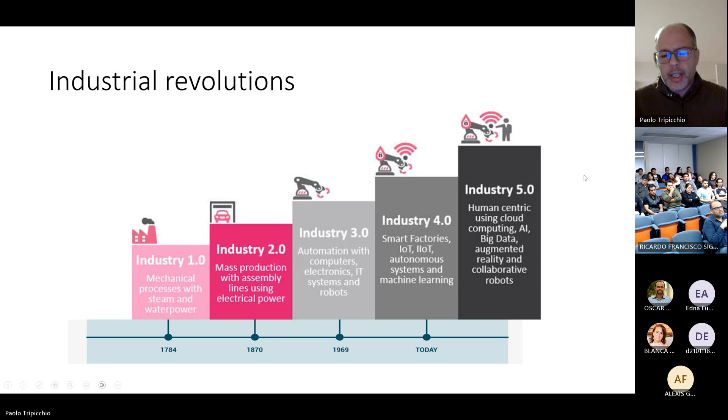And today we are in what we know as Industry 4.0 or 5.0. Basically there are a lot of techniques or disciplines that are fused together, and we are trying to focus on the human, so on human-centric industry. In particular, Industry 4.0 has been funded worldwide in European, US, or even Italian programs, focusing on many pillar technologies, like the ones shown here.

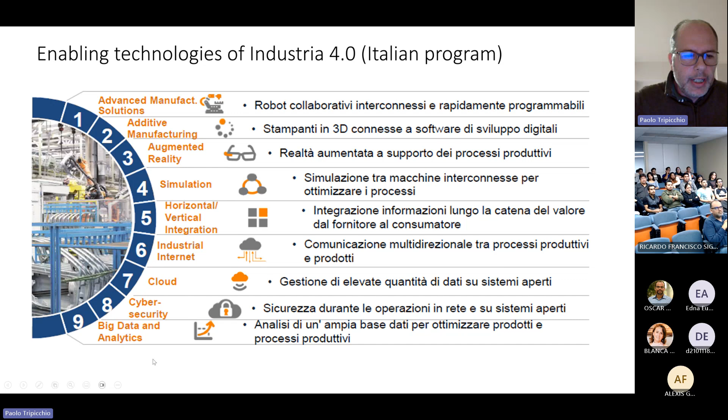So, for instance, additive manufacturing for 3D printing of parts, or augmented reality, or Internet of Things, industrial internet, and introducing also artificial intelligence through big data analytics and applications.

So what I want to discuss today is what we have to expect from the industrial point of view, where we are moving, and how to try to solve the demands, the difficulties that could arise in the next industrial scenarios. We have to ask ourselves what are the demands that the market and these scenarios search for.

So the first consideration is that for sure we are moving from environments that are completely structured, so we know every phase, every single line, what should be done, and instead we are moving to unstructured ones. So we don't know a priori the sequence of actions that we have to perform to accomplish a given task.

The second aspect is that many processes in industry today require the flexibility of humans. The flexibility from a point of view of cognition and perception, so to understand what has to be done and to perceive the environment and the aspects, the complications that could be in the environment, and of course also adapt, if we look at manipulation capability, so adapt the way we interact with objects and tools within the industry.

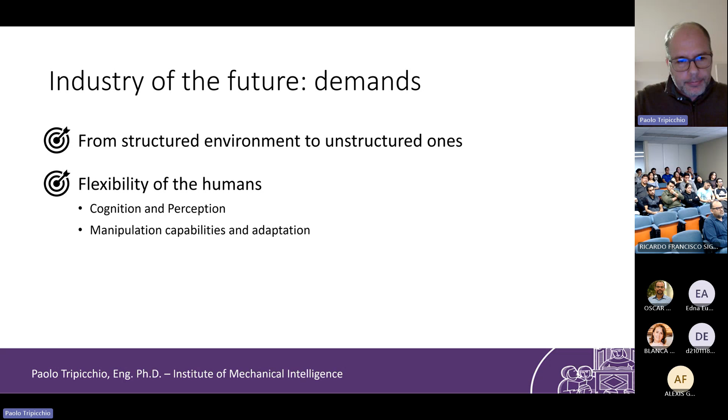A third aspect is that we are moving back from what was mass production to instead realizing customized products. So for each client could go on the internet and order a specific product, but customized for his needs. So we need to be able to reconfigure the cell to adjust the process to create specific products.

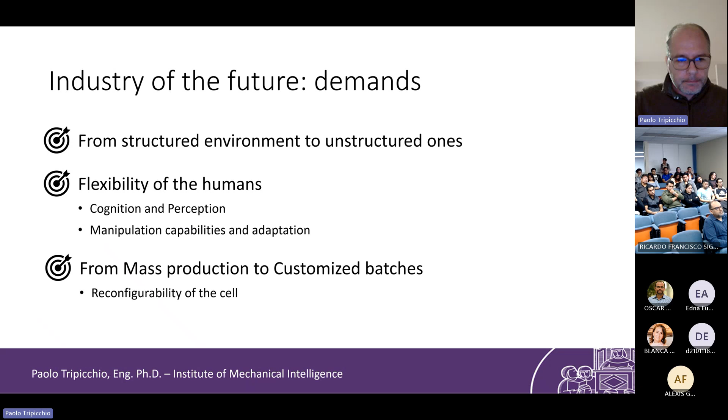So the paradigm is shifting from the simple-by-design paradigm, or with the Latin motto divide et impera: I decompose a complex problem into several small parts so that I can manage easily to solve these parts. Instead, we are going back and we have to face the uncertainty. This is something that in field robotics is done every day. Basically, we have to construct a model that represents the world, that takes into account uncertainty—the fact that I cannot easily model everything, so there is some sort of noise in the process, and I have to deal with that.

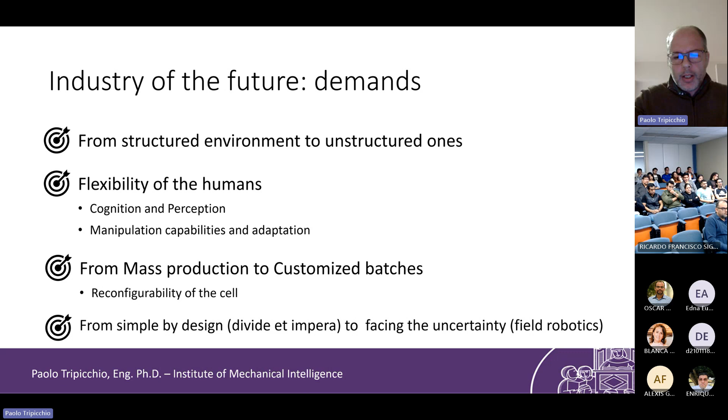So how can we do this? Basically, we have three elements that are common elements for every control engineer. The first element is the sensing. The idea is that I can create or put new sensors into the process.

So sensors that allow me to measure something that I couldn't measure before. For instance, an application that I've done a few years ago, where we 3D printed robotic fingers, with the aim of creating conduits to place fiber optics in. This fiber optic is used to sense the stress and strain of interaction with objects. In this case, the principle is really simple.

We use the Bragg effect. Basically this is the fiber core, and we write on the core these gratings. We make these parts of the core opaque, and when light is injected into the fiber, part of the light is reflected back on the reader, depending on certain wavelengths that depend on how I wrote the grating on the core.

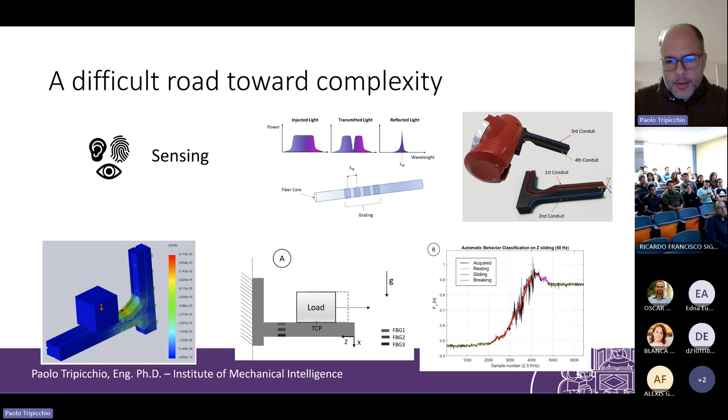But when we are talking about sensing, we don't refer only to the use of new sensors or integration of sensors, but also how we process the information. In this case, there is the field of artificial intelligence. We know that we can build particular architectures that allow us to be more robust, to improve our measurements.

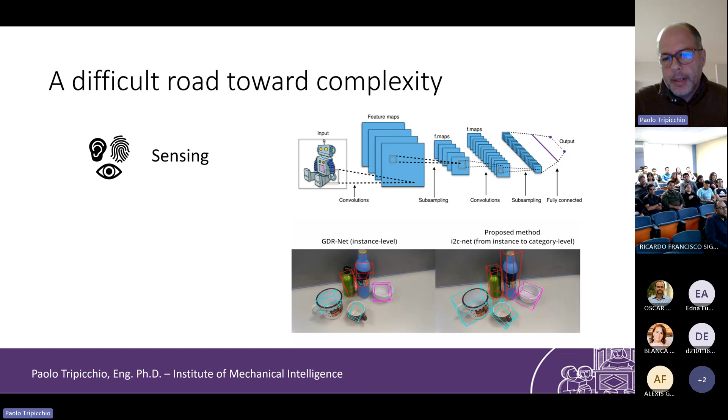So the second element is the actuation. Again, here we can integrate new concepts, new materials, new ways to actuate, for instance again in the grippers, and perform actions into the world.

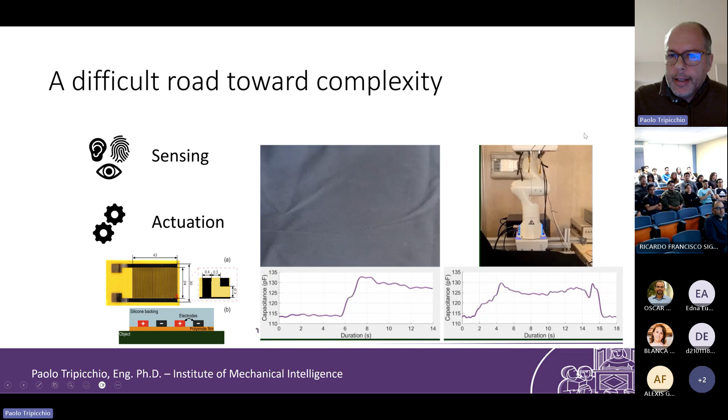Here is an example of an electroadhesive gripper that we developed. Basically, we replaced the fingers of the robot with this electroadhesive pad, and as you see, we are able both to grasp objects and also to sense, by looking at the capacitance of the circuit, if the object has fallen from the grasp. So in this case, we have integrated both actuation and sensing together.

The third element is the control. In this case, again, we can insert intelligent controllers, so we can build artificial intelligence algorithms directly inside the controller.

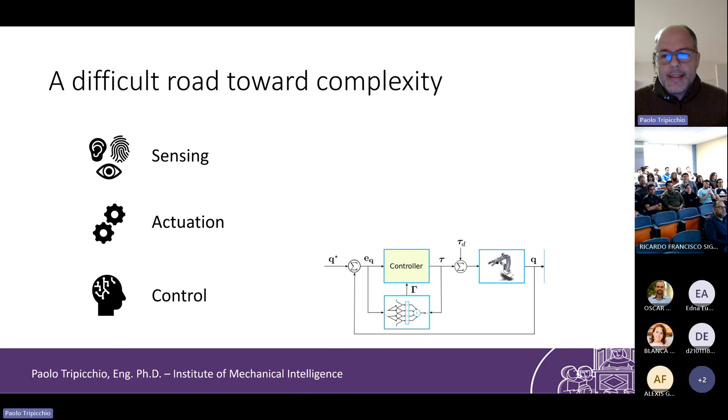For instance, here we have an application of imitation learning. We can train our control strategies directly in simulation, in this case using a couple of graph neural networks in cascade. The system is able to understand the sequence of motion and task it has to accomplish, starting from one single image—in this case, one single image of the goal configuration that I want to achieve.

And then I can train on simulation and transfer this directly to the real world to verify if our approach, our algorithm, is robust enough to work on real scenarios.

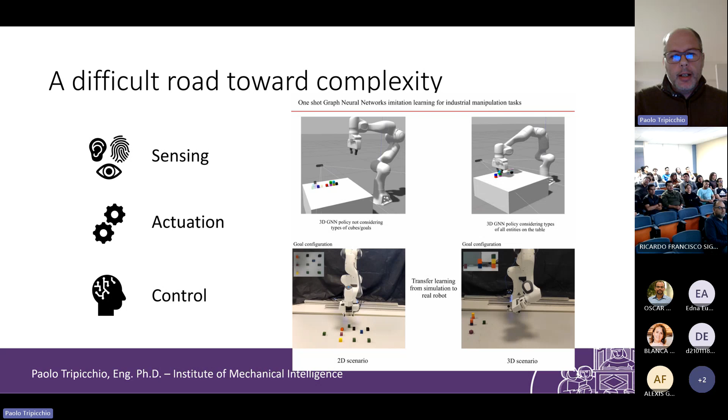So I will start now to show you some applications specific to the field of robotic manipulation. That is one of the biggest application areas in industry.

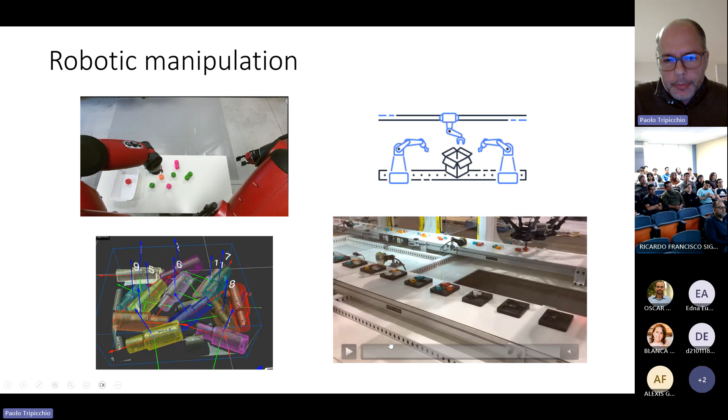When we talk about robotic manipulation, the main problem is picking and placing objects in an environment. So we have three elements in this problem: one is our robot, another is the vision system, the sensing system we discussed before, and then we have the object to be picked or placed.

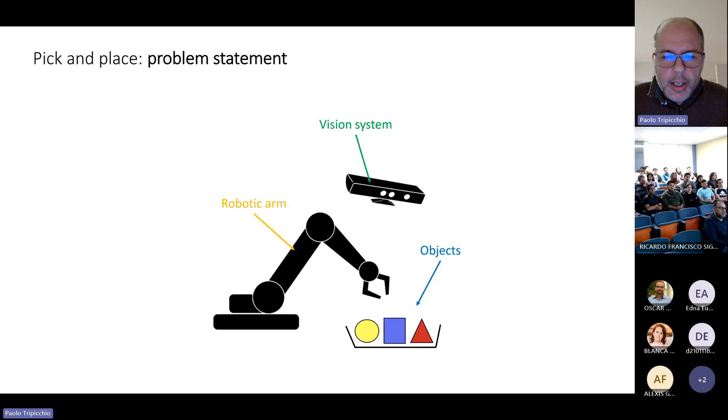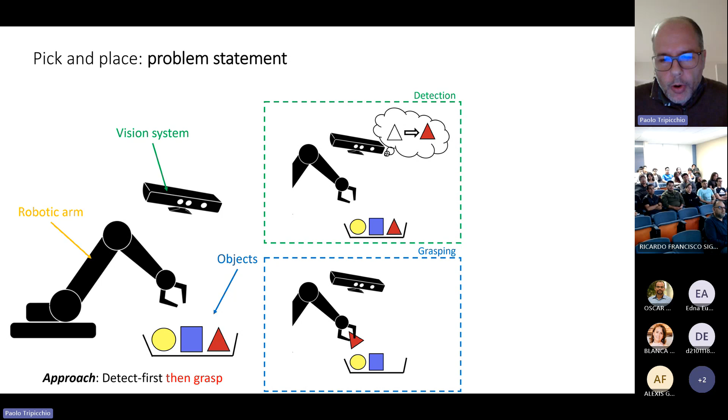So the simplest approach to solve this problem is called detect first, then grasp. We have a first phase that is detection, so our vision system should try to identify an object from a certain description, a certain mathematical model of the object itself. Once I have detected this object, I can give a command to the robot to go and grasp this object.

In this example, we have some key points that are exactly the three elements I presented before. The first element is we have to design a gripper, so we have a part of actuation that should be designed. Then we have the development of the vision algorithm, the sensing. And third is the control that is needed to plan the sequence of movement and action that the robot has to do to achieve the grasping of the object.

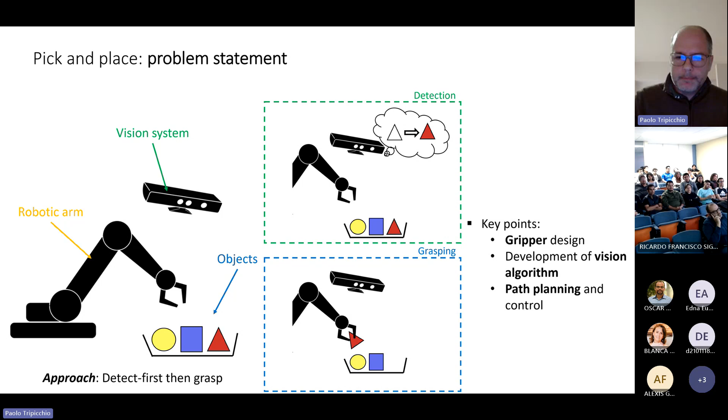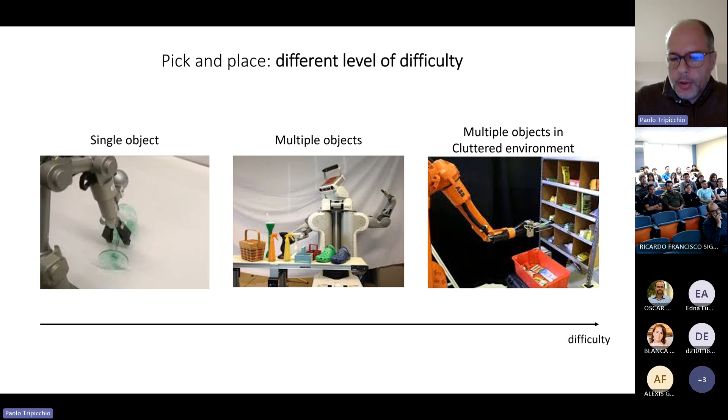These problems have different levels of difficulty. We start from single object, the most simple case, so we have a single object on an empty space. Then we can have multiple objects, so we can have interaction between objects. And then we can have the problem of clutter in the environment, so we have a lot of objects that can occlude themselves, a clutter of objects.

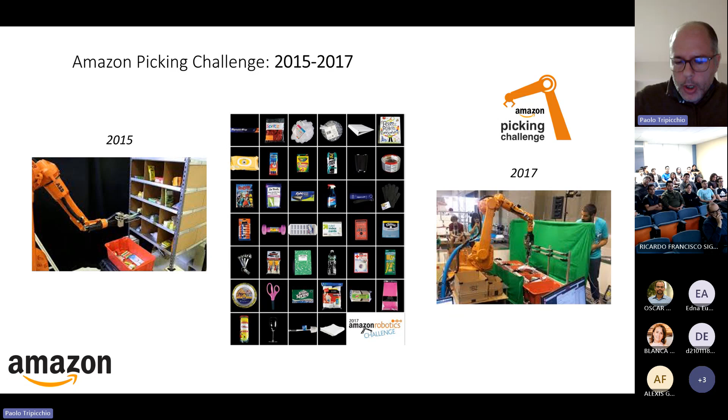To analyze this problem, Amazon started what's called the Amazon Picking Challenge in 2015 and 2017, trying to stress research on this topic and proposing some challenges that should be done, and a set of objects to be picked by robots.

A solution presented in literature shows a different approach from the classic one. They reversed the approach to reduce the timing needed to accomplish this problem. So their approach was grasp first, then recognize. They grasp an object, then they see, okay, is this the correct object or is it another one?

The first, called multi-affordance grasping framework, decides which grasping primitives to use. They define these grasping primitives: suction down from the top, suction from the side, or grasping down, or flush grasp if the object is really close to the border of the bin. They trained a network that highlights the highest value for each of the grasping primitives.

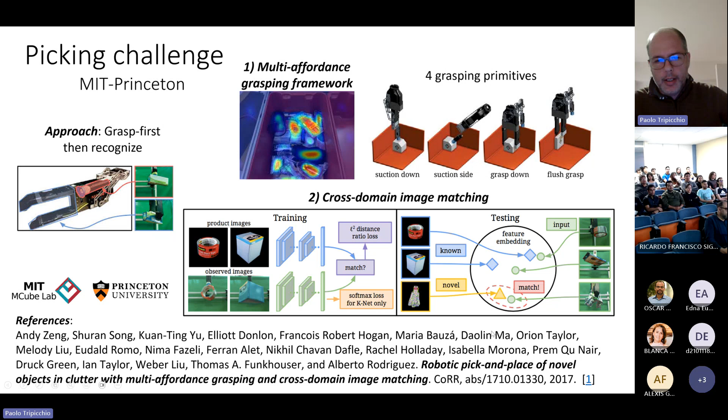Other, more classical approaches are commonly used in two-finger grippers that need as sensing element a 3D sensor. In this case, a sensor could be an RGBD camera or also a laser scanner that should provide a point cloud, so we have information not only about the color, but also about the 3D shape of the objects.

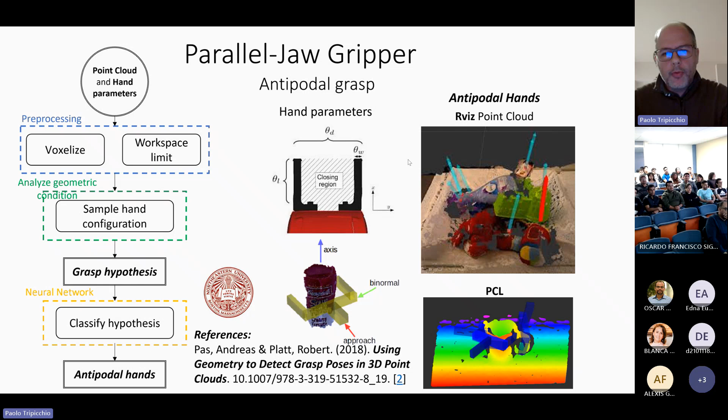This is needed because there is a need to verify the normals to the objects and find two opposing normals to use for parallel grasp. So for every surface that possesses these capabilities, I can generate a grasp hypothesis and then select the best one to use. Another approach can instead be used employing a different actuator.

This is a gripper called universal jamming gripper, made by a plastic membrane filled with granular material like coffee grains, using suction to remove air from the membrane. This membrane applies three different kinds of forces to the object we want to grasp: static friction with the object, interlocking, and suction activities.

The idea was to test both the classic approach with the two-finger gripper, and then we developed a custom universal jamming gripper, creating a system using ROS to control the whole architecture.

We started testing this system using a set of objects that we selected, chosen because they have different properties. We were interested in checking the problem of reflective materials that could affect the vision system, or the porosity of material like a carton box, which can change how the object adheres to the gripper, or objects that deform or have asymmetric centers of gravity, with varying weights that should still allow the robot to lift the object.

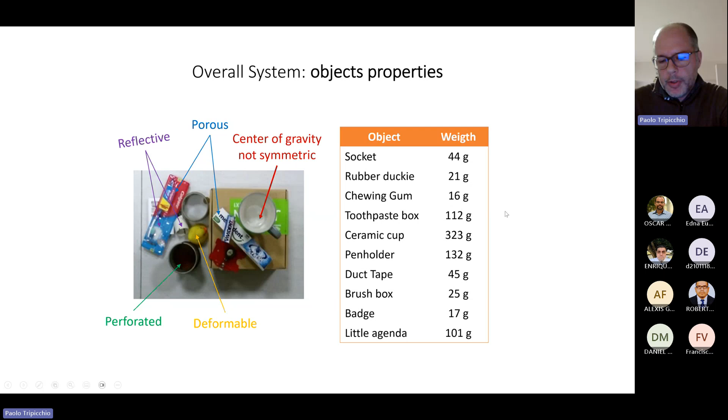Since we used a robot that was not so performant, the weight couldn't be too large.

So we defined an algorithm able to detect edges and corners, because we wanted to use this feature as input for picking using the universal jamming gripper.

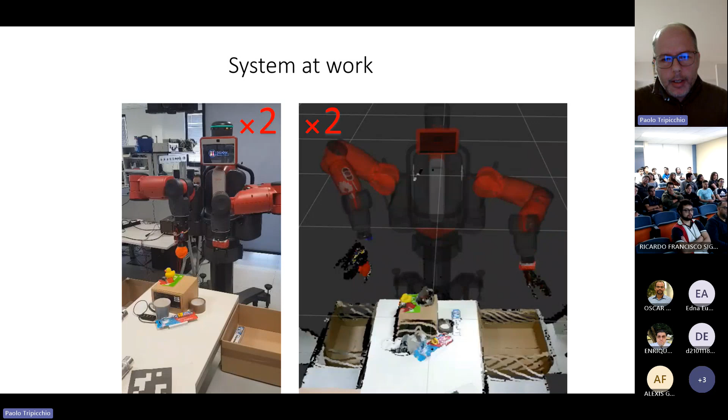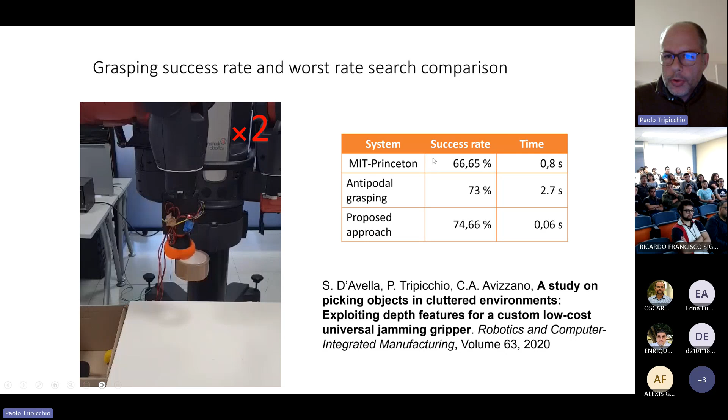What we achieved is that our system was really competitive with existing systems - the one I showed before, the MIT Princeton solution, and the classic antipodal grasp. But the really interesting point is the timing: using our simple computer vision algorithm, we scaled down the time significantly. Not only did we achieve a good success rate, but we also reduced timing.

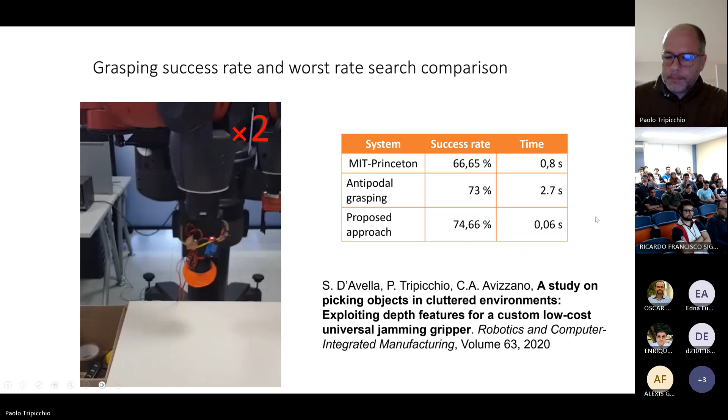Now I want to talk about a problem related to the flexibility of humans. This is an application we developed because this kind of task in industry is usually performed by human personnel, because the objects we have to manipulate - Ray-Ban glasses - are really deformable.

The problem is that these glasses have to be attached to a frame for the galvanic bath. But both the hooks on the frame can be deformed, and also the nostril part is really deformable, so humans can easily adjust these parts during the attaching phase, but with robots it is much more complicated.

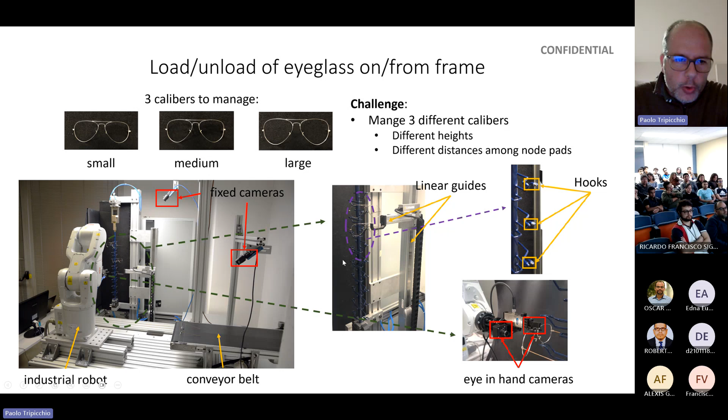So we had to use computer vision and control to achieve this result. In particular, we had to identify the position of all the hooks in the frame, the position of the glasses on the conveyor belt, the position of the bridge inside the glass frame, and the position of the hooks and nose pads in real time.

We did this using a support vector machine classifier, one of the most used machine learning approaches. What we obtain here is the phase of picking.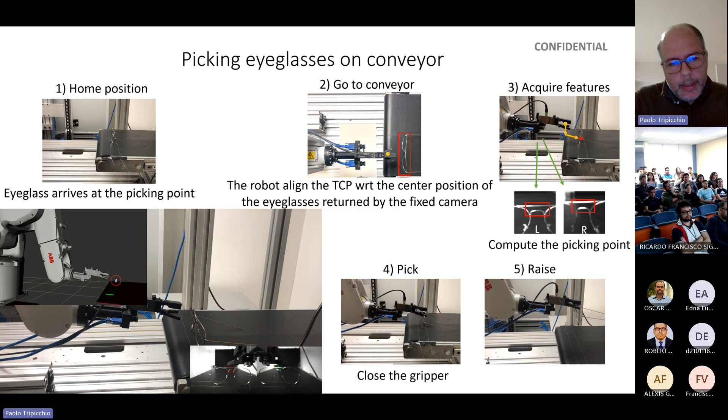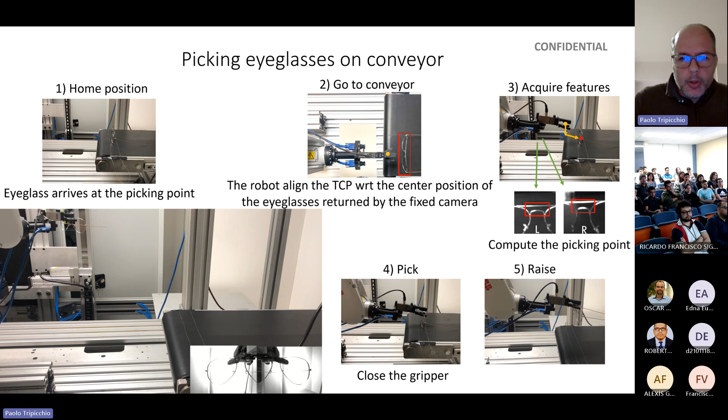So the robot approaches the glass, then localizes the bridge in the center of the glass, and is able to go and pick it. This phase allows it to pick different versions and models of the glass, because we adjust to the glass itself, and we are not restricted on how to grasp it. The second part is the hooking.

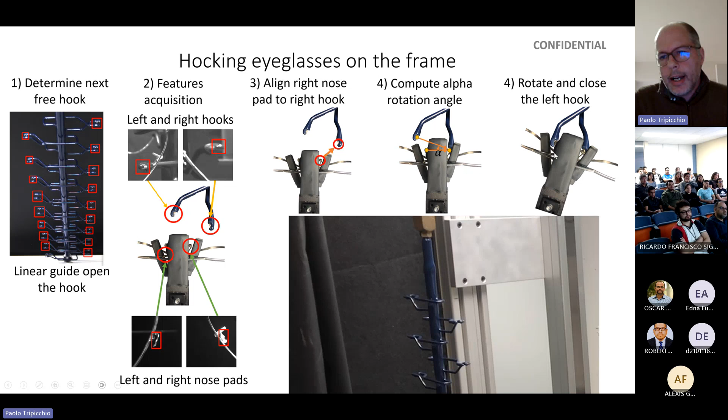So we have to approach the frame, then recognize the position of the hooks and of the deformed nose pad, and adjust, doing this kind of pivotal rotation, to attach the glass to the frame.

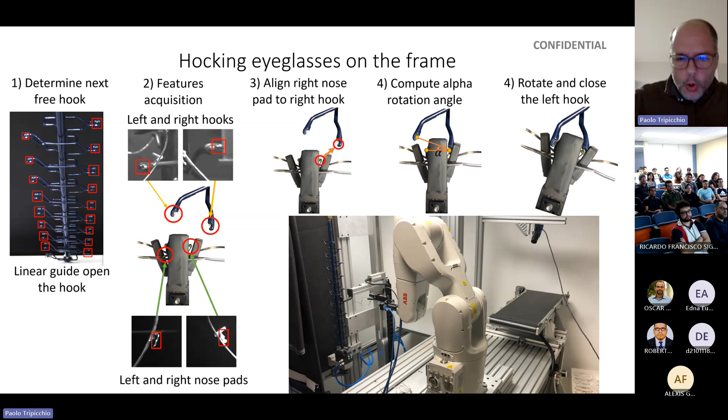You see here, there is a video. This is at low speed because it was one of the first experiments. So we used a linear guide to open the hooks, then the glasses are put close.

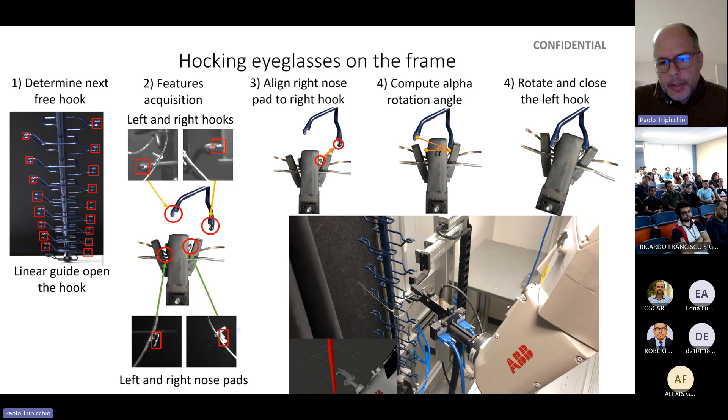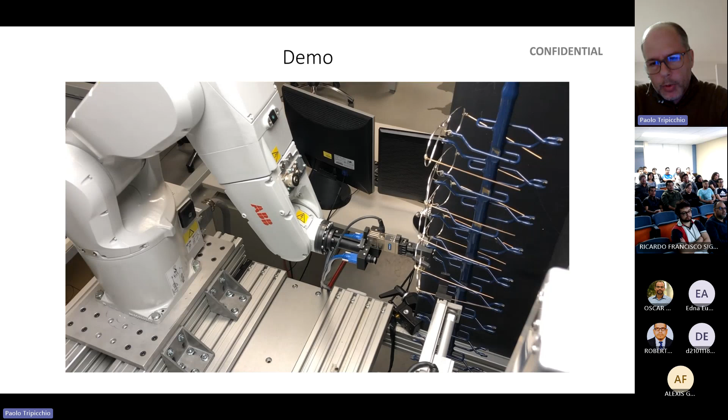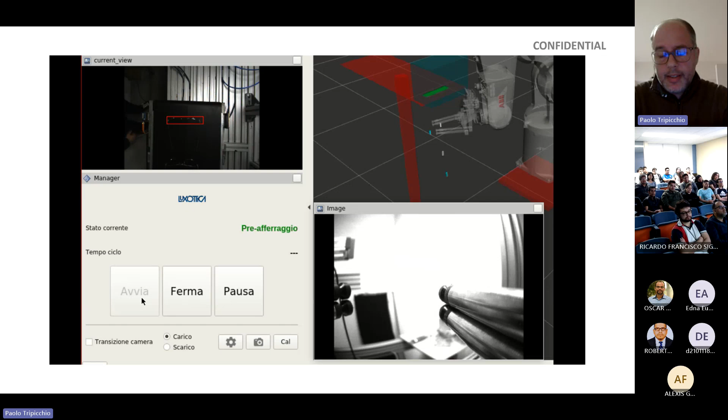There is computer vision that analyzes and measures the position of the hooks and pads in real time, and then we compute a sequence of motion that allows us to attach the glass to the frame, and as you see, this is attached. Here we have a video at normal speed showing you how the whole operation is done, and we achieved this system with a cycle time of 7 seconds, which was the goal to be obtained.

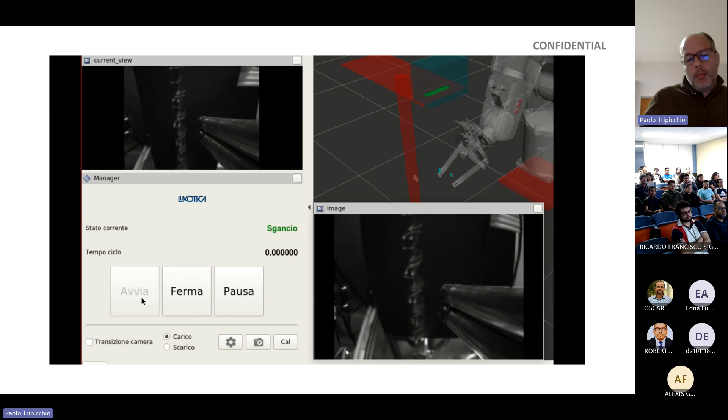So we were able to, using computer vision and artificial intelligence, adapt the system to be flexible and to replace a task that is usually performed by human personnel.

Another important element to analyze is the planning. We have to be able to pick and place an object. There is the need to verify if we are able to perform a certain motion in space, and in particular, take into account possible collision, so we have to analyze mathematically and determine a set of motions of the robot that avoids collision.

And in particular, what we are interested in is the task that we have to accomplish. So basically, we can have a hand-over: I pick an object, in this case a screwdriver, to pass it to a human. That is a hand-over.

In this case, I will prefer to pick the screwdriver from the top part, not from the handle, because I have to pass the handle to the user. Instead, if I have to use the tool myself, it's better if I pick it from the handle because I have to use it. So we have to define constraints that should be optimized in the problem we want to solve, to be able to correctly pick and use or place an object in the space.

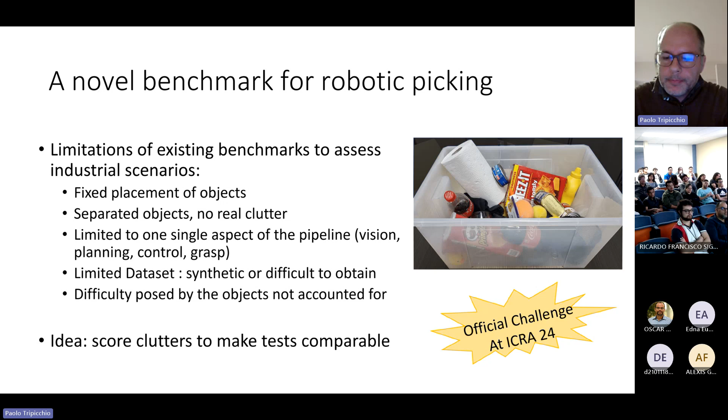So to realize this benchmark, we started from existing benchmarks, of course - we didn't want to reinvent everything from scratch. So we selected some objects from the YCB benchmark, from the Amazon Picking Challenge I introduced before, and from TLS, another benchmark. Some objects we had to change because they were no longer available or could not be bought.

So we selected only objects possible to buy worldwide, not only in one region of the world. Then we tried to select objects with different materials and properties, to stress the system we want to test. And so we performed an evaluation questionnaire, given to the research community, to evaluate the difficulty of picking every single object.

Thanks to this evaluation, we were able to generate 4 subsets of 10 objects each. The benchmark can be run on the first, second, third, or fourth subset, or on the full set of 40 objects together. These subsets have increasing difficulty, with subset 1 being the simplest and subset 4 the most difficult.

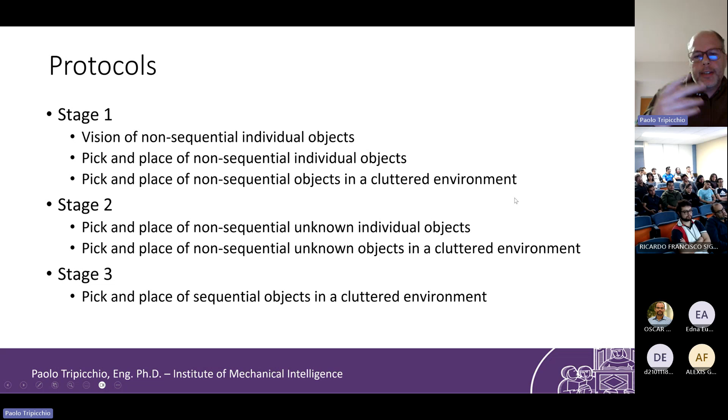In all the other trials, the objects were non-sequential, so I could just grab the first object and it was good enough.

To help with this, we also realized a dataset. It can be used for testing the benchmark, or for training vision and grasping algorithms. In particular, the dataset, having all the objects of the benchmark, simulates rigid, soft, and deformable objects.

For instance, here you see the glove that falls on top of the cheese-it box and deforms on the surface. We also simulate liquid in a simplified manner, so we can have the Coca-Cola bottle with liquid inside.

The idea of this dataset is that we realize different versions of the same scenario with different lighting conditions and intensity, color, or HDR maps. These are used to generalize vision algorithms.

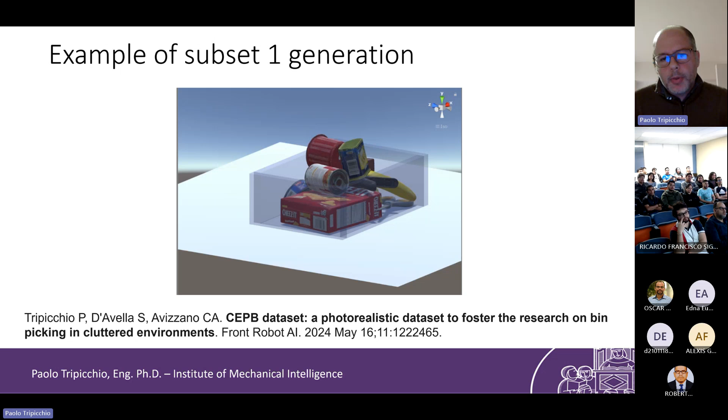This is an example of generating a subset. Objects are made to fall from a specific point over the bin, and they fall one over the other. When all the objects of the subset, in this case 10 objects, are at rest position, we take these images that are used as the dataset.

We pass to the next scenario, as introduced before—and here is the proof. Basically, we have these 4 subsets, and the difficulty of this scenario is increasing from the first to the fourth.

We define metrics to compute the difficulty of the scenario used by the benchmark, depending specifically on a curve that shows the percentage of occlusion of objects, because occluded objects are more difficult to recognize from vision, but also to pick with a gripper.

To test the benchmark, we realized an architecture suitable for multimodal grippers like this one. This gripper has the ability to grasp with 2 fingers in close position, 2 fingers enlarged with a suction cup on the tip, or magnetic grasping capabilities—it can grasp 2 objects at once, and so on.

We define a pipeline to recognize the object and select the grasping position for each object. Here you see a selected position to grasp the banana object with a 2-finger grip, showing the outline of the fingers.

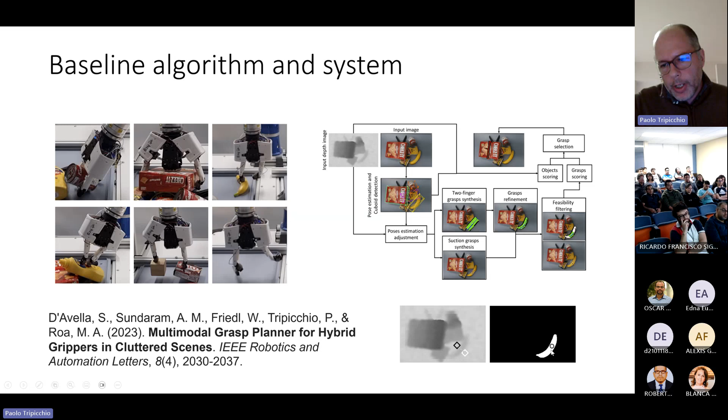And here, the same banana object, but with the position for the suction cup—in this case, it wants to pick the banana from the center.

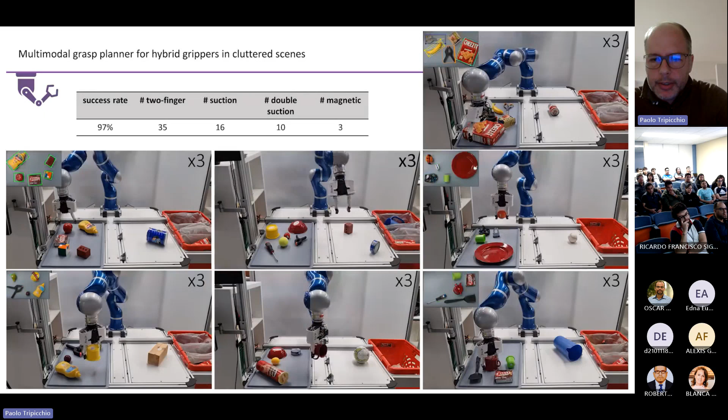There are some videos of trials. We started with the simplest scenario of clutter, called structured clutter, where objects are separated from one another.

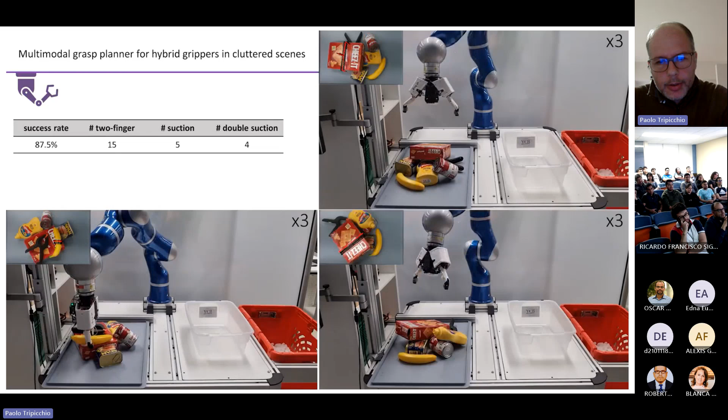This instead is a dense clutter, where objects are one on top of the other, so there is occlusion. The most difficult is the bin picking, because we also have the constraint of the bin.

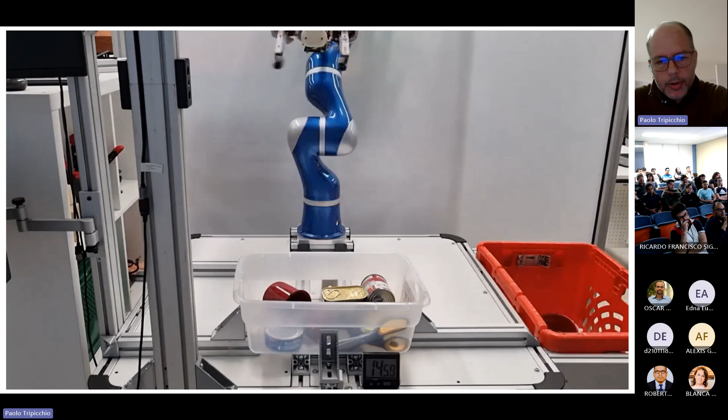Here you will see that sometimes it fails, so it tries again, selecting other objects and so on, until it's able to perform a pick. In this case, it has changed the object and so on.

The result is basically that starting from a scenario, in this case we have 3 trials. Since in each trial we shuffle the bin, the objects inside have different positions and placement. So I can compare the result on each trial, because I have this procedure where I segment the objects in the bin, compute the occlusion between objects, and based on this occlusion calculate a maximum score. Depending on how many objects I was able to grasp, I obtain a score normalized with the maximum score of that scenario.

So for robotics manipulation, this is a short summary. We have said that we need to model the uncertainty and work in an unstructured workspace. To do this, we need to improve the sensing capabilities, either with AI or with new sensors that can give us more information, or we need to develop and design novel mechanisms and principles, or exploit novel materials. For instance, the use of different grippers, the jamming gripper, and so on. In general, there is a need to embed intelligent behavior, both in hardware and software, and we try to focus on working with clutter, so with different objects and conditions, to provide flexibility, like in the case of the Ray-Ban glasses. We also built a benchmark to analyze the performance of the proposed system.

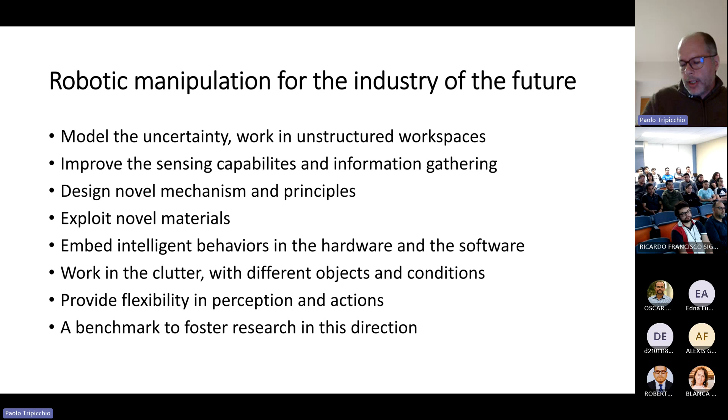Now I want to talk about other fields of application in industry. One is logistics. In this case, logistics using RFID tags, radio frequency identification tags, are used for some scenarios. In particular, they are used for item identification, substituting the classical barcodes that you find on every product. They can also be used for self-checkout, but we focus more on real-time inventory, the ability to change and update the inventory of a warehouse or retail store on the fly, without the need to go close to each object and rescan the barcode.

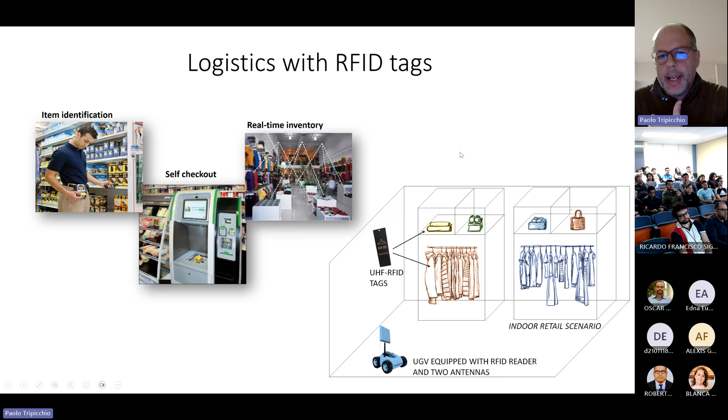The concept was this: I have a mobile robot, I put one or more antennas on the robot, and then the robot moves on the floor of the environment and creates a real-time inventory of the objects in the scenario.

To do this, we studied the problem of the phase signal. Here is a depiction of the reader circuit board, where I have transmitter and receiver electronics, an antenna, and this is the tag that has another antenna. We are talking about passive tags, so basically this tag has no power and is powered by the electromagnetic signal that arrives on the antenna.

This signal has a phase because it's a wave that propagates on a medium, and this phase, as written in this formula, is related to the distance r between the two antennas, in particular 2 times r, because the signal has a distance r to move from the interrogating antenna, the reader, to the tag, and the same distance to return back to the reader. So 2 times r.

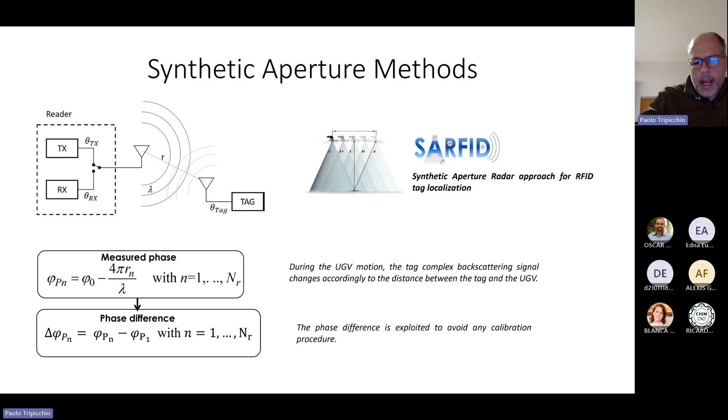As you see here, there is a phi 0 that is a value depending on the electronics of the circuit. But if I take the difference of consecutive readings, I can remove phi 0, because it's fixed. So I have an equation delta phi that depends only on the distance r. The idea is that if I repeat this procedure, taking multiple measurements at different locations because I moved the antenna, I will be able, through trilateration techniques, to measure where a tag is in space.

So one of our works uses synthetic aperture with phase unwrapping. This is because the phase is a periodic value, changing with a period of 2 pi, so we need to unwrap this value to make it continuous instead of going from 0 to 2 pi. Then in this scenario, I have a first reading at position AP0 and a second at AP1.

So what you see is that this hyperbola, this one in black, is the locus of possible positions of the tag, because it intersects all the circumferences centered on the 2 positions. So basically, if I have 2 readings like this, I can know that the tag reading belongs to this hyperbola, but I don't know where.

So the idea is that I can perform a motion with the robot, move to another point, find another hyperbola, and intersect the hyperbolas and so on. The problem is, of course, that there is uncertainty. There is noise in the measurement, noise given by the scenario, the environment. There could be electrical noise, occlusion, or other refraction noise and so on.

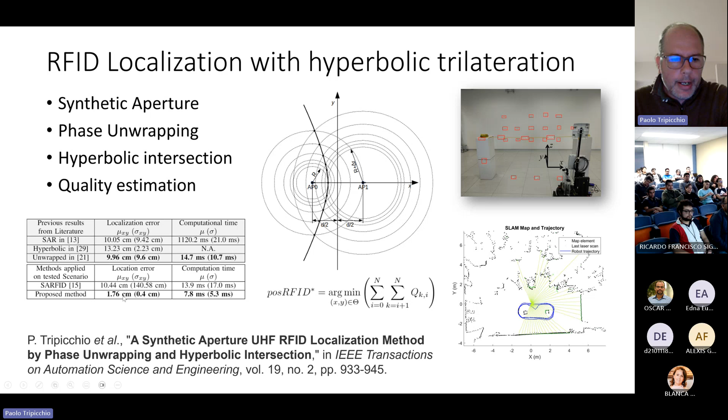So we propose a quality estimation approach that uses this formula here, that is used to select the best intersection that could estimate the real location of the tags. And we obtain good resolution, a localization error of like 2 centimeters, okay?

Then we continued this research, and since we are using synthetic aperture, it's important to understand that we have a problem with the third dimension, because our synthetic aperture, since we use a ground robot, is only on the plane XY. So the robot moves over this plane. So the idea was to move the antenna also in the Z axis.

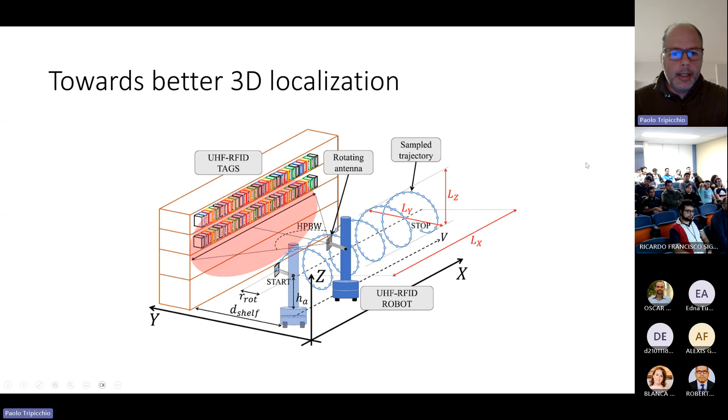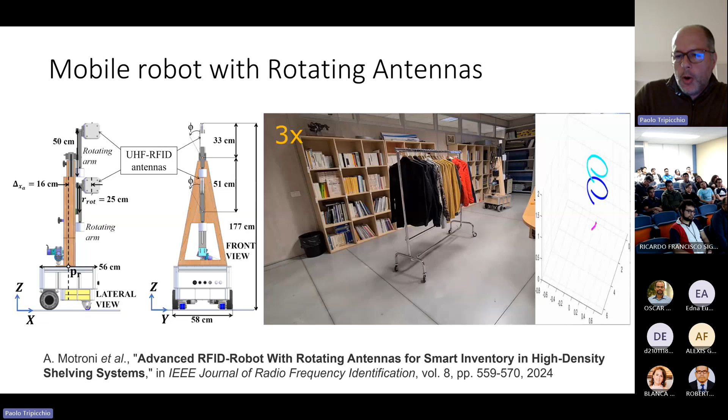We have done this by creating a rotating motion, so we can achieve this kind of helicoidal motion of the antenna. This is the custom robot we developed with the rotating antennas. As you see, when it's moving in the environment, it's able to produce this helicoidal trajectory on the scenario. So we have a synthetic aperture in all 3 directions, and this in turn improves our estimation of the localization.

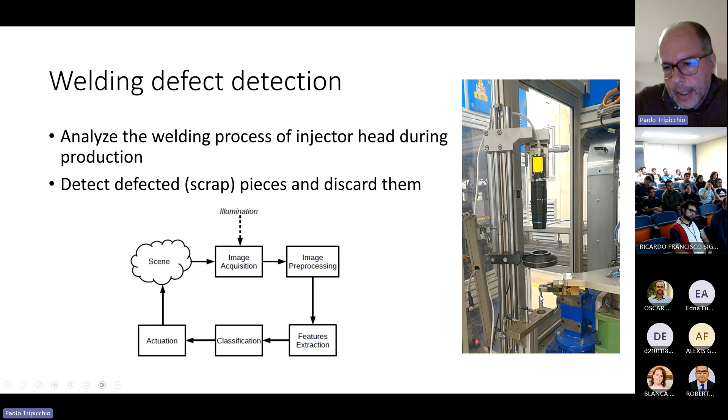I want to show you a third application that regards welding defect detection, the quality inspection of elements. Basically, the problem was to detect defects in welding of diesel injectors for cars. We have to acquire the image of these injectors with an acquisition system. Our client asked us to recognize 4 types of defects: blow-hole defects, excess or lack of material, misalignment of the center, or thin or large welding joints.

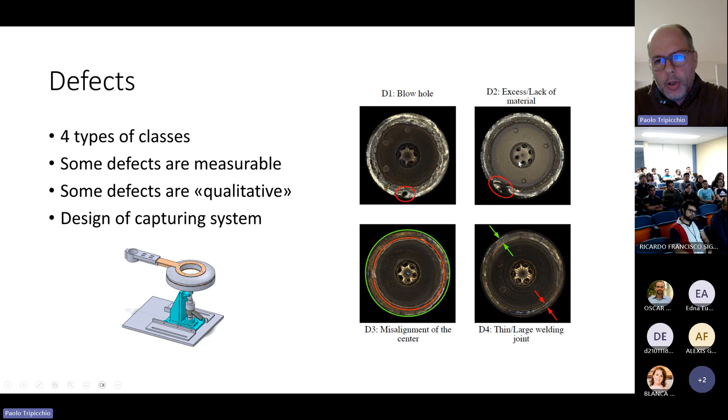So these, the 3rd and 4th defects, can be measured by taking an image, fitting circles, and measuring elements, okay? But these other 2 elements are difficult to measure, difficult to model. So we decided to use 2 different approaches: for the measurable ones, classic computer vision, while for the other 2 we use a machine learning technique, a deep neural network that can estimate if there is a blowhole or excess or lack of material. So we developed a system with a camera and an illuminator.

We designed the illuminator, and then this pipeline that had 2 steps: classic computer vision and deep neural net. You see here an example of computer vision where we fit circles and points over the image to measure some quantities. And for the deep neural network, we created a problem called binary classification. We were just interested in understanding if the image could be classified as a good piece or a scrap piece, a piece that could be thrown away.

But the main problem was that we had few samples. This is a problem common to industry, because if there is a good industry, they will produce really few samples of scrapped pieces. And the other problem, given this scarcity of samples, is data imbalance. So we had a lot of data of good pieces, but few images of scrap ones.

So we decided to use an architecture called DenseNet. The idea here is that this architecture uses concatenation on successive layers, and this allows reducing the dimension of the whole network, making it thinner and compact. So we chose this DenseNet to solve the problem.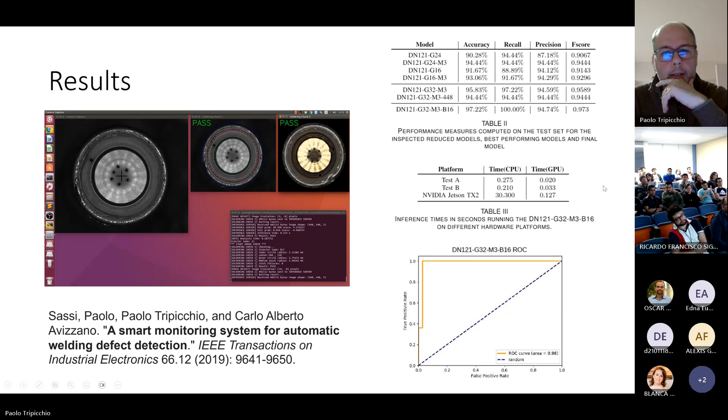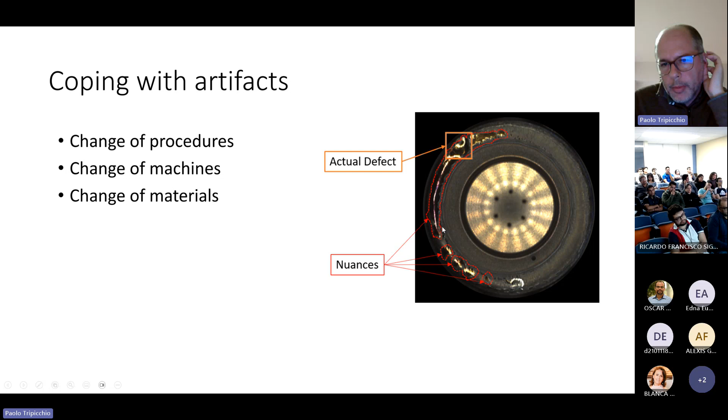Then we had another problem. The year after we finished this approach, our customer changed the material used for the welding. So looking at the images, they have this strange shiny gold, violet nuances. There is something strange. So the architecture we proposed at the beginning didn't work anymore because it was confused between these nuances and the actual defects. So the idea was, instead of retraining from scratch, to use a filtering technique.

This is the original image where we cut the central part because it's not used. And we use 2 filters, a patch filter and a median filter, to, let's say, normalize the image in some way. And the result was quite good.

So basically, we show that using filtering, we could maintain the old architecture. And of course, there was also the problem of data imbalance we mentioned before. We have different quantities of values for good and scrap pieces, and the problem is more complex if the classes are not easily separable.

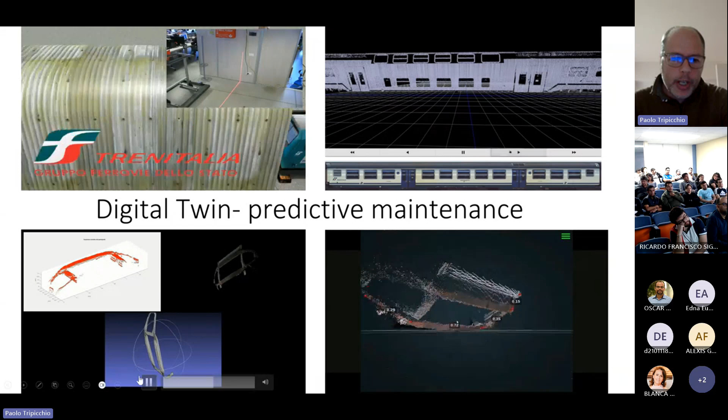And then looking at historical data, so previous acquisitions of the same train, we can understand if something has changed, if we need to perform maintenance. For instance, we can measure the thickness of this part that is in contact with the power line. If it's too thin, we have to change the structure. So we can perform predictive maintenance.

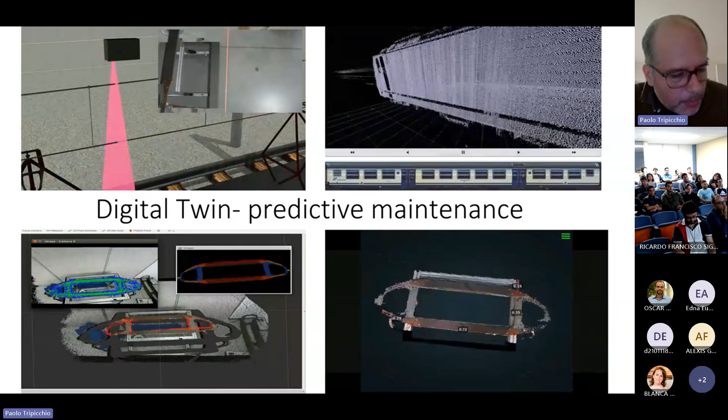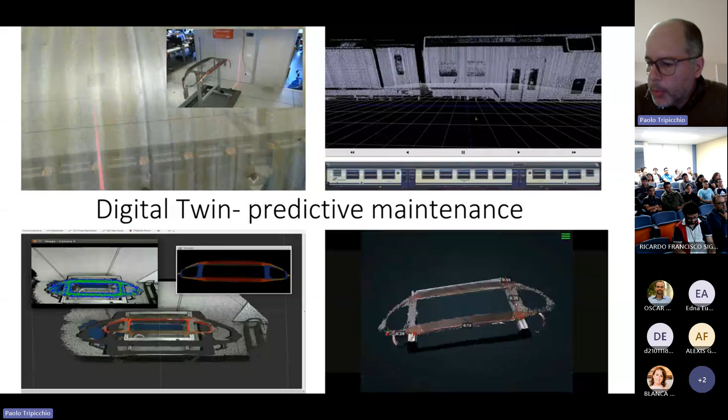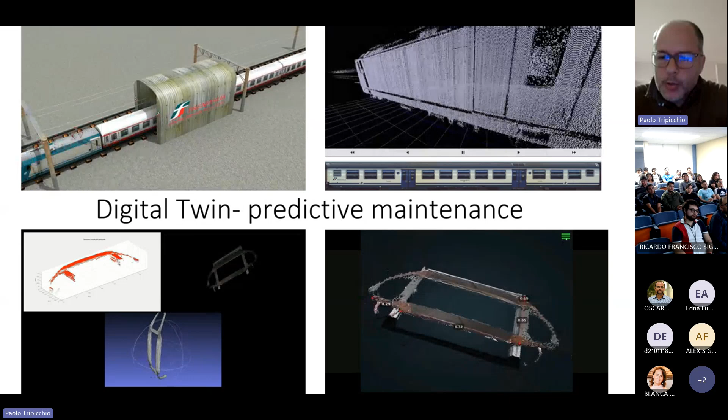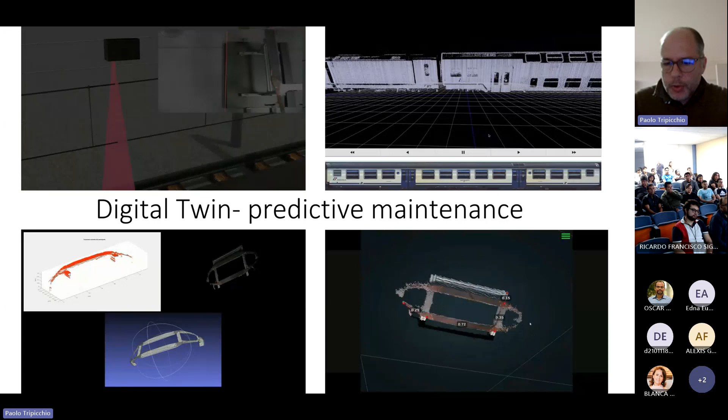I've given you some examples of application, in particular here for predictive maintenance, computer vision and artificial intelligence for quality inspection, application of robotics in logistics, and in particular robotic manipulation for picking and placing objects. I tried to show you some aspects that are surely important for the industry of the future, where we have to stress our attention: integrating intelligence inside our hardware and software, finding new materials, new concepts, new designs for actuators, or introducing new sensing elements to solve the problem of passing from a completely structured environment to an unstructured one.

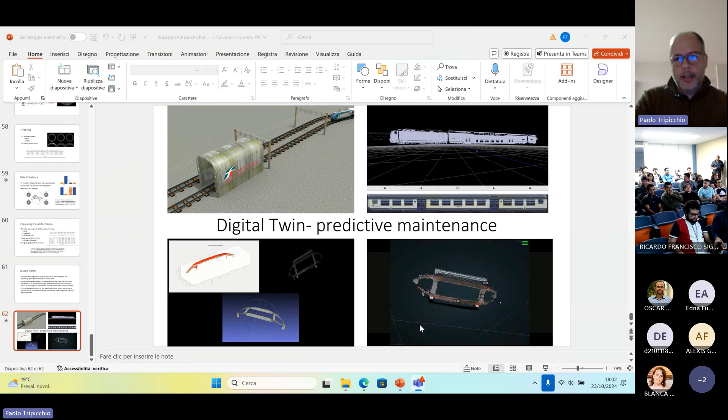Hi, doctor. Can you hear me? Yes, yes. Okay.

I just have two short questions. The first one is, I don't know if you mentioned it, but what kind of code language do you use in your algorithms about the AI visual system? And the second one is, what software do you use in your visual system and robotics simulations?

Okay, so basically in all our works we mainly use C++ and Python. For what regards the artificial intelligence and computer vision applications, we use mainly Python, because there is a large community of packages and frameworks you can use. In particular, for learning and quality detection, we use PyTorch, which is a standard library for tools for machine learning and supervised learning. And...

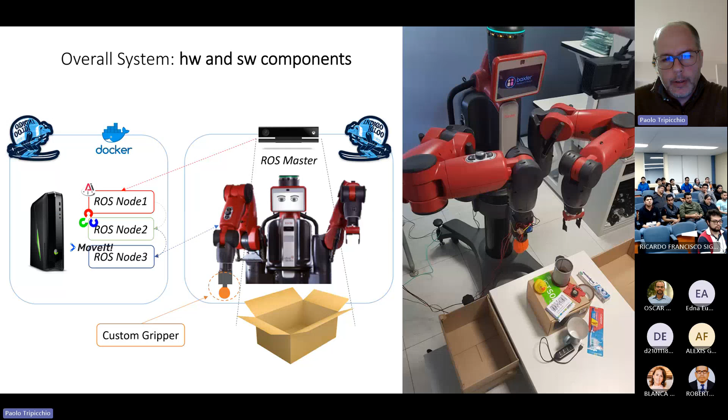In this case, what is shown is the solution for the jamming gripper. So the idea is that in the jamming gripper, you have this membrane, a plastic membrane that deforms when it goes in contact with the object. And the gripping force depends also on the surface of contact with the object, okay? So the idea is that you can exploit friction, interlocking, or suction, okay?